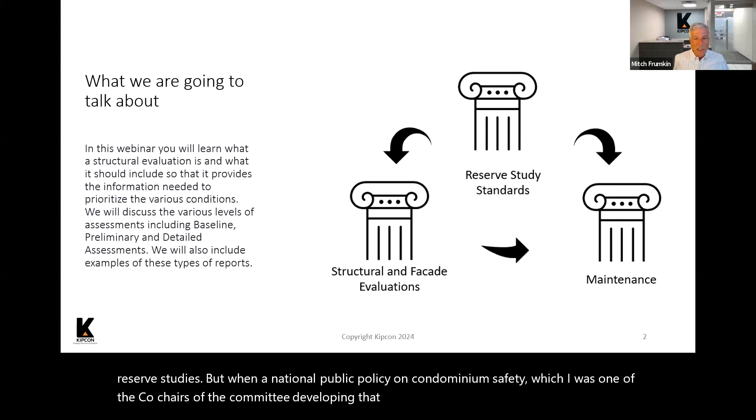One of the things that came into play very quickly is people were thinking the cause of the tragedy was due to the reserve studies. But when the National Public Policy on Condominium Safety - which I was one of the co-chairs developing - came together, we concluded pretty quickly it's not just reserve studies. It's connected to the structure and facade of the buildings, and maintenance, which is a big part. If you tie these three things together, this is what keeps our buildings safe.

So when I go through the presentation, I've pretty much broken it down into these three parts.

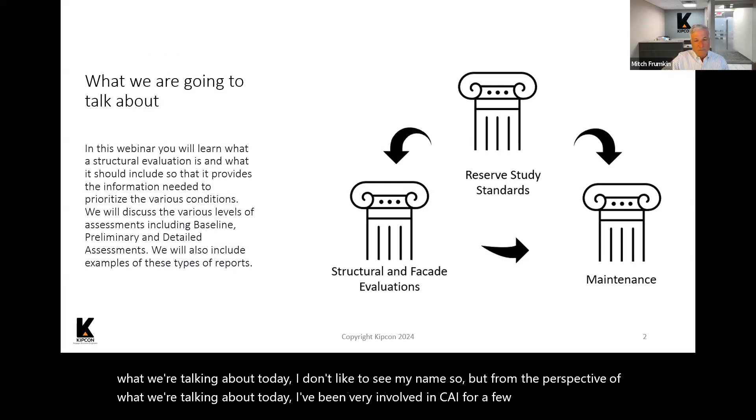Not that I want to bore you, but this is a little bit about me - I don't like to see my name up there, but from the perspective of what we're talking about today, I've been very involved in CAI for a few years. I was national president a number of years ago, but when Champlain Towers happened, CAI immediately put together a task force for the public policy on condominium safety. I was one of the co-chairs of the original version, and the only engineer involved in structural engineering on the task force.

We reached out to over 600 people across the country for input, and we came out with a public policy, which I'll show you a picture of in a couple of seconds. As this evolved, CAI then said we're going to update our reserve study standards to reflect preventive maintenance and structural integrity, and I was one of the co-chairs of that task force too.

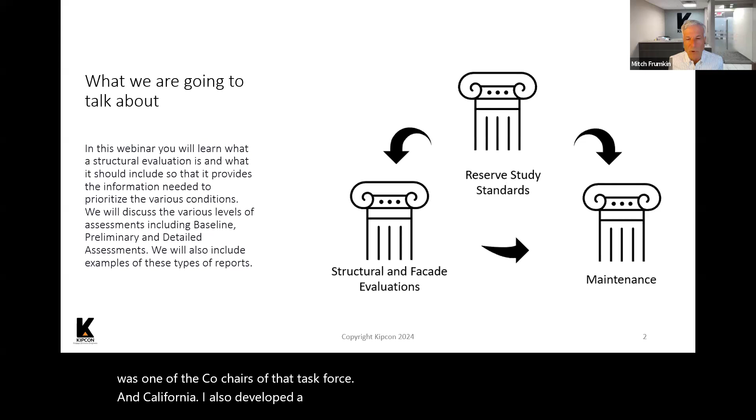CAI also developed a best practices report on maintenance, and I was one of the 3 or 4 people that worked on putting together that report. All these things are free - we can send you copies of the best practices report, the reserve study standards, all this stuff.

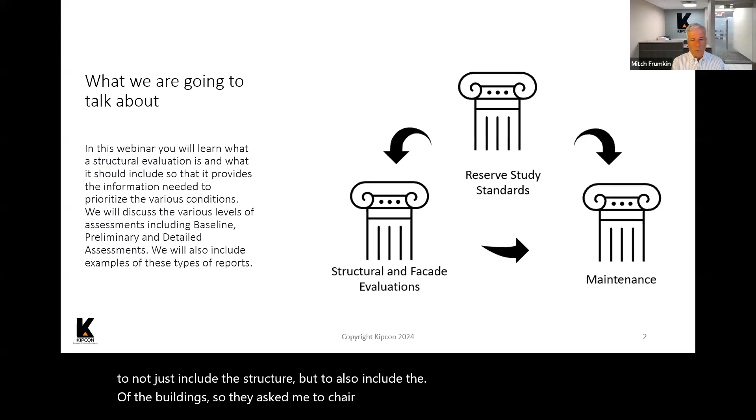Then CAI, about a year after this, decided based on feedback that we really needed to update the public policy on condominium safety to not just include the structure, but also the facades of the buildings. So they asked me to chair that task force, which I did, and the public policy on condominium safety was updated. One of the main changes is that it now includes facade evaluations, which I'll touch on as I'm going through.

So that's my involvement in this stuff. As a matter of fact, yesterday CAI New Jersey had a webinar on legislative initiatives, and I gave a presentation on what the structural integrity legislation and reserve study legislation in New Jersey is about.

So what we're talking about is to solve problems, not create more. For example, I'm going to touch on underfunded reserves, no maintenance makes the conditions worse, and no inspections let the buildings age without even knowing you have a problem.

Champlain Towers. Last summer in New Jersey, we had a balcony collapse on a condo which killed a worker. This impacted two things. In the state of New Jersey, we made sure, which I'll touch on in a second, that balconies are included as part of the structural evaluations.

And as well, the national public policy includes the facades, which include balconies. So this was due to things we learned as well as this collapse that took place in New Jersey.

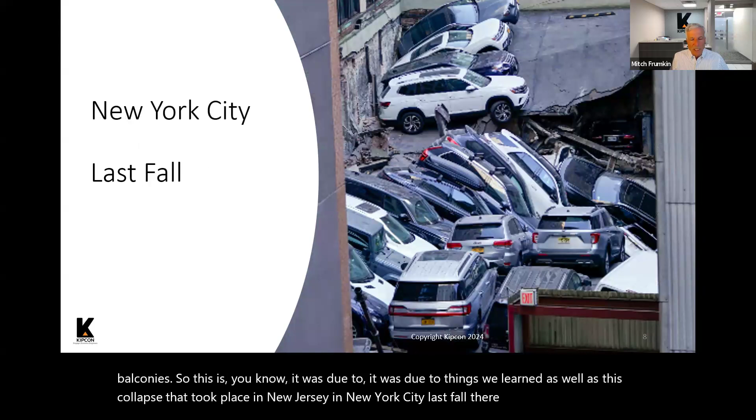In New York City last fall, there was a parking garage collapse due to lack of maintenance. And also there are a lot of things that happened in Florida based on new laws. I'm sure you read about it, whether you're from Florida or not, regarding the structural safety of a lot of communities in Florida - all kinds of things have been going on.

As a matter of fact, I was down in Florida on business about a month or so ago, and I was drawn to the site of Champlain Towers. So I went there and walked around, and there's a board there with the names of everybody that died in that tragedy. I was drawn to it because I've talked so much about it.

But in a lot of cases, it may say you have to do a reserve study or funding, but not both. And what good is doing a reserve study if you don't also fund it?

So, for example, the new laws in Florida require that you do reserve studies and fund them. In New Jersey, it's very specific that you do reserve studies and fund them, which I'll touch on, and maintenance and structural integrity. So this is how it's all tied together.

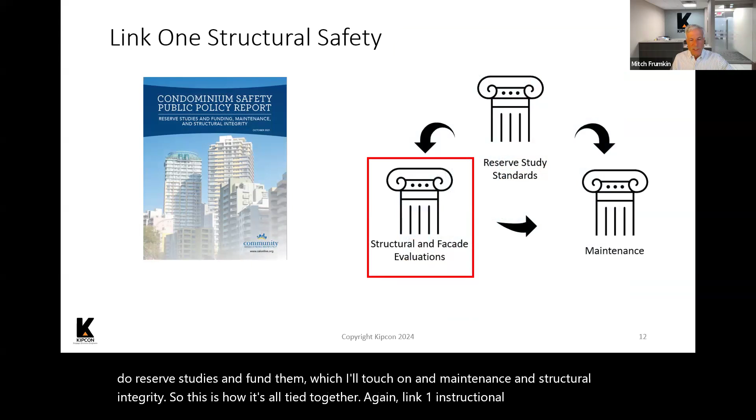So link one is structural safety. And let's talk about what is a building structure. Like I said, I'm going to go through this kind of quickly because I'm on slide 16 of 98 and I have 10 minutes left now.

That's why I'm looking over here, because you can see the arrow, right? I think you can see it.

It's made up of columns, which are the vertical things that hold up the floors, the roof, that type of thing. It's made up of this bracing. Let me go to the next slide because it's a little clearer.

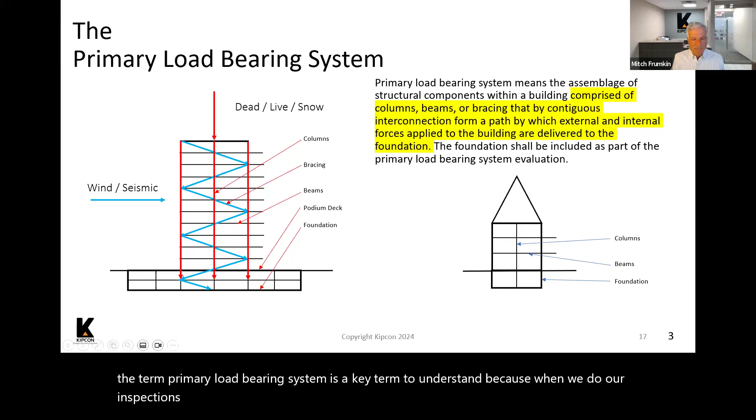And I'll show you why that's important. The term primary load-bearing system is a key term to understand, because when we do our inspections, it's based on inspecting this primary load-bearing system. I'll show you why in a second.

Here's an example of a primary load-bearing system. And you see, this is an actual building. Now you see it doesn't look just like this. You've got the beams, you've got the columns, and you have the bracing. This is a building that was under construction that I saw, and I took a picture of it.

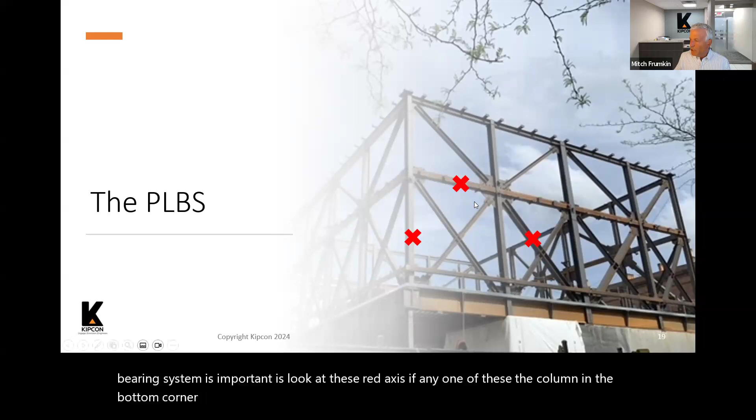So what this is showing is the purpose of the inspection and why the primary load-bearing system is important - look at these red X's. If any one of these, the column in the bottom corner here, or this beam, or this bracing, if any of them are not maintained for some reason and rust away, this happens to be a steel building, then there's a possibility that if this column is rusted away, there's nothing holding up this section of the building and it will collapse.

If this bracing disappears, rusts away, what's going to happen when the wind blows? The building can fall over. What happens if this beam rusts away? Then this floor can collapse.

So the thing to keep in mind from this is that the primary load-bearing system is based on a system where if any one part of it deteriorates and disappears, the building can partially or totally collapse.

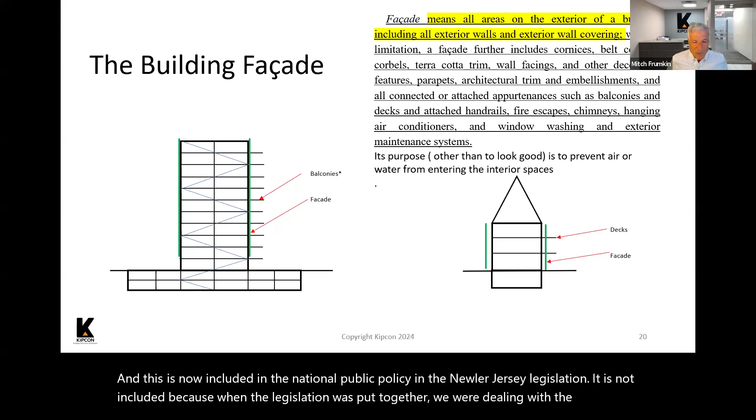That's the thing to keep in mind regarding the primary load-bearing system. The building facade is now included in the national public policy, but not in the New Jersey legislation, since that was dealing with the structure and it's hard to change legislation once it's in the system. The New Jersey legislation doesn't include the word facade, but it does include this balcony, which I've marked with an asterisk. Although the balcony is really part of the facade, we included it as part of the primary load-bearing system to make sure it gets inspected, without having to change the entire legislation.

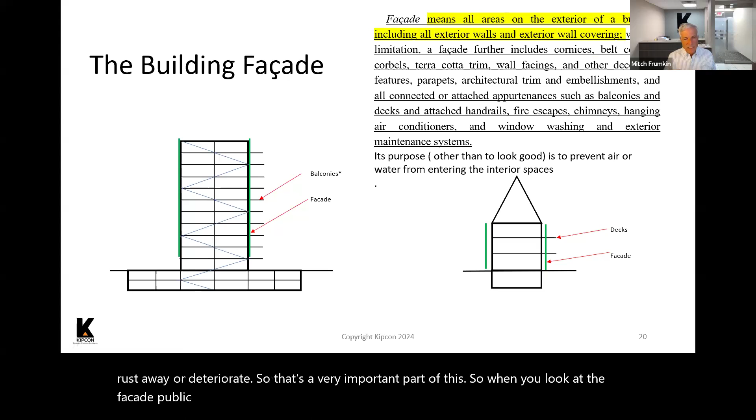The building facade protects the building from the elements like rain, and it makes the building look good. But probably the most important thing we don't pay enough attention to is that if water gets through the facade, it can reach the primary load-bearing system and cause it to rust away or deteriorate. So when you look at facade public policy or any facade legislation, it's not just about inspecting the structure of the facade and balconies, but also inspecting anywhere water can get through, like expansion joints, to make sure water can't penetrate the facade.

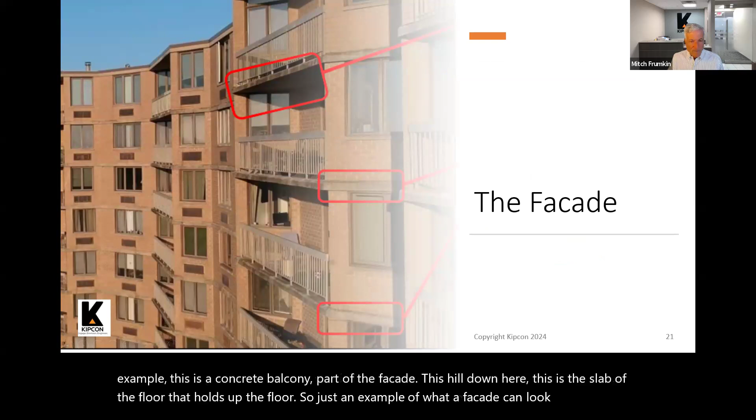I've gone through it pretty much in detail. There are some changes, but more in terms of simplifying the way it's written rather than adding new content, because it's already a pretty comprehensive manual.

We looked at what others do around the world. In Ontario, Canada, they have specific requirements for structural condition assessments of existing buildings. That came into place about 20 to 25 years ago after a parking garage collapse in a condominium. They require, I believe every 6 years, a structural review as part of a reserve study. Singapore has the most comprehensive structural integrity inspection requirements I've seen for residential buildings, called Safe Structures and Buildings, and it's quite detailed. We used these as references when putting together the CAI public policy.

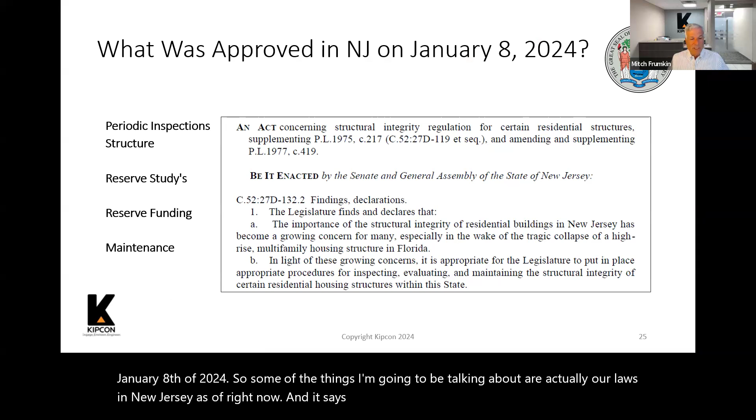At the beginning of the legislation, it says the importance of structural integrity of residential buildings in New Jersey has become a growing concern for many, especially in the wake of the tragic collapse of a high-rise multifamily housing structure in Florida, which was Champlain Towers.

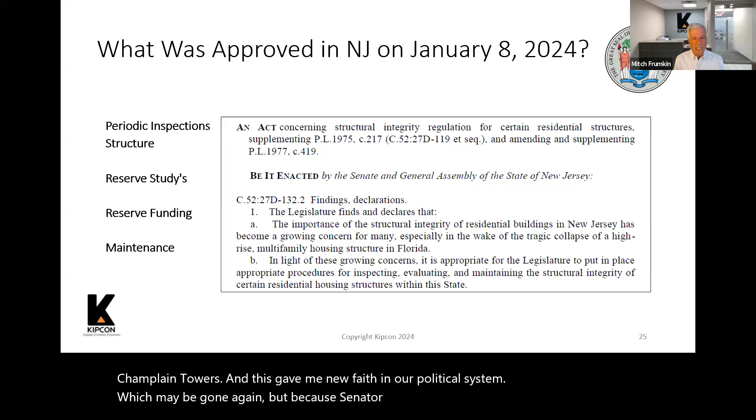This gave me new faith in our political system, because Senator Singleton in New Jersey reached out to us, CAI, to put together this law. So myself, Ed St. George, and Dave Ramsey in New Jersey worked with the senator to put together this legislation based on CAI National's public policy. I don't know what would have happened if CAI National hadn't done that public policy, because I don't know what people would be using to come up with their legislation.

I was also on a task force in Delaware. New Castle County, Delaware came up with a legislative initiative for periodic inspections, including the structure and facade, as well as requirements for maintenance. That's been law in New Castle County, Delaware since about May of 2023, so about a year now.

If you look at the CAI National website, under their governance section you'll see a listing of all the different states that have things in the works in terms of reserves or structural integrity legislation, what's in process, what's been approved, what's been denied. You can see a listing of what's going on.

Now, 'covered building' is a very important term to understand, because in the legislation and public policy, a covered building is a building that should be required to follow these requirements.

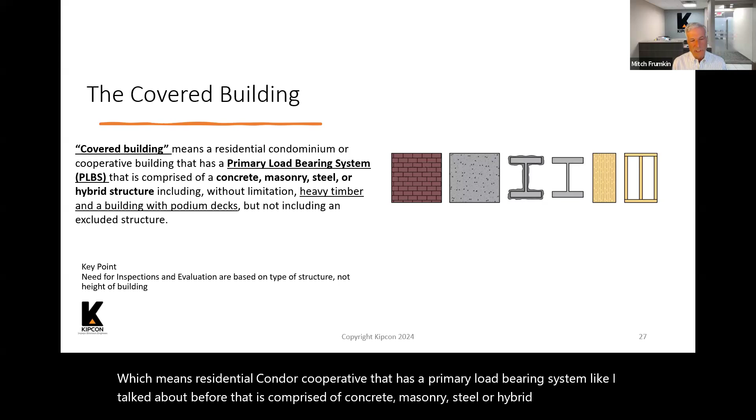So for example, in New Jersey, there's a definition that says these are the types of buildings that need to do these structural integrity inspections, called a covered building. It means a residential condo or cooperative that has a primary load-bearing system, like I talked about before, comprised of concrete, masonry, steel, or hybrid structure. Hybrid structure really means a combination of concrete and steel, for example, including without limitation heavy timber.

Now I'm going to talk about heavy timber for a second. In a few seconds I'll show you some pictures, because people say heavy timber could be just any type of building made out of wood. But keep in mind, this has to have a primary load-bearing system of heavy timber, meaning that if one piece of that wood rots away, a portion or total part of the building can collapse. Keep that in mind, I'll show you a picture in a second.

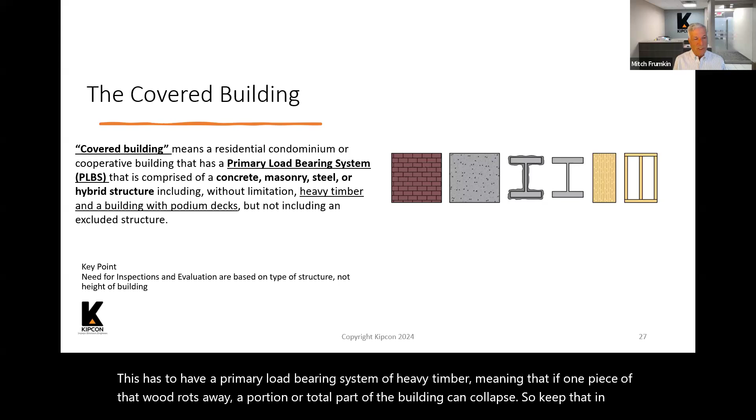And building with podium decks, but not including an excluded structure. I'll tell you what an excluded structure is in a second, because everybody's concerned about whether their building is included or not. Key point to remember is that structural integrity inspections are based on the material of construction. It is not based on the height of the building.

So it's not high-rise buildings. There are plenty of buildings much shorter than high-rises that have primary load-bearing systems made out of concrete, masonry, steel, or any of these things. The difference, which I don't think is on a slide, is that structural integrity inspection is based on the material.

When it's based on facade inspections, it is based on the height of the building. Most of the legislation you see says you need to inspect the facade if the building is more than 3 or 4 stories in height. In Delaware, because I was involved in it, it says 4 stories in height, but if it has balconies that are less than 4 stories, you still have to inspect the balconies, even though you don't have to look at the facade.

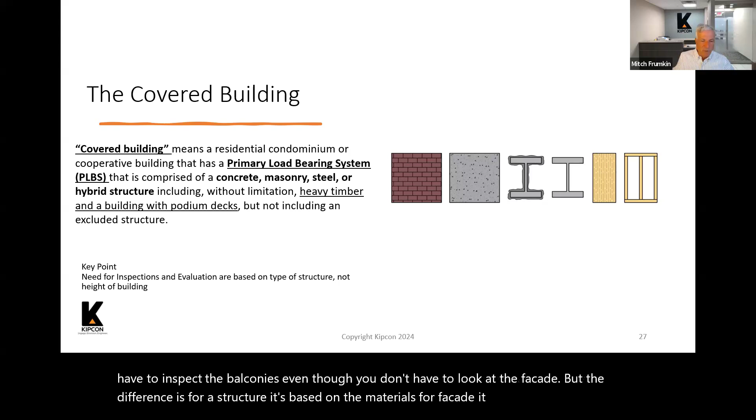The difference is, for a structure, it's based on the materials. For facade, it is based on the height of the building. So that's a covered building. Now, I added these slides this morning.

Let's talk about concrete. Concrete is comprised of two different materials: concrete and steel reinforcement in the concrete. Concrete is very, very good in compression when you push it together. It's not good in tension when you pull it apart. Steel is very strong in tension. So concrete is made up of...

...steel. The reason the steel is put there is because there are certain sections of a concrete beam or column where it may go into tension. I'm a structural engineer, so I'm not going to go into a lot of detail, but that's why reinforced concrete has steel in it. It's made up of two materials, reinforced concrete.

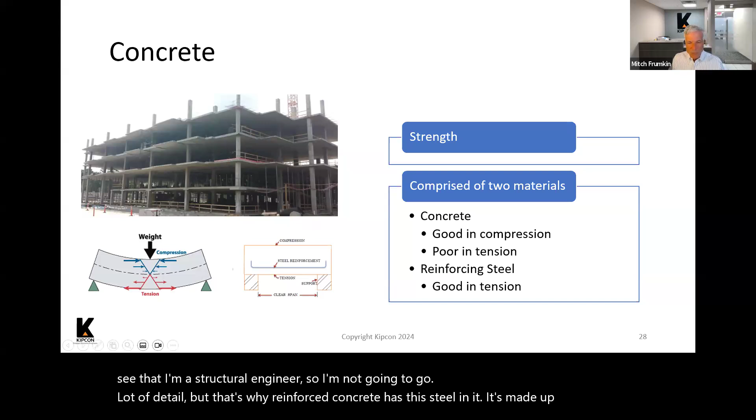As it gets bigger, it pushes out the concrete. Concrete is very bad in tension, like I said. So when you're pushing out the concrete, it gets in tension, and sections of it fall out. So a very, very common cause of deterioration is structural. In reinforced concrete, the steel on the inside rusts because water gets through the concrete.

I could go into detail about how to prevent that and different things I can do, but it's very common. Water gets into the concrete, rusts the reinforcing steel, and then pops out the concrete, which exposes the steel even more. It rusts more and more, and the conditions get worse and worse.

It doesn't take an engineer to tell you that you have problems with a reinforced concrete column or beam, because you can see the rust on the surface, you can see the conditions. You need an engineer to tell you how to fix it, but you can tell when these problems are occurring, which I'll show you some pictures of.

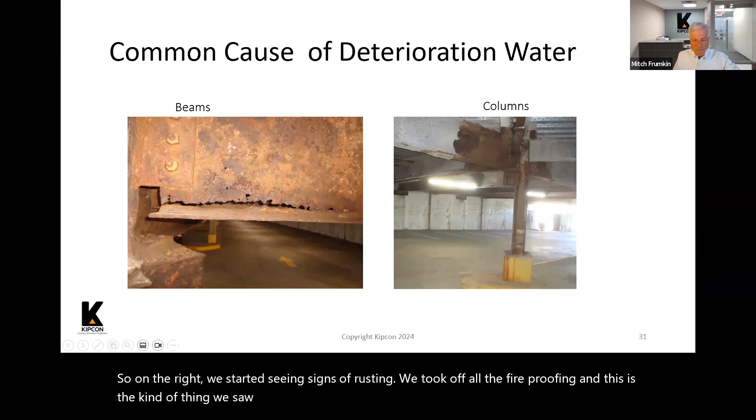The thing that makes it even harder to see is that in a lot of parking garages and below podium decks, the steel is covered with this fireproofing material, this white stuff. So you can't see the steel, but you can see signs of rusting if it starts turning brown. On the right, we started seeing signs of rusting. We took off all the fireproofing, and this is the kind of thing we saw underneath. So steel rusts and loses its strength - that's a problem with steel.

Wood is a very interesting material. I'll show you where I really like wood, because wood has so many different things going on. Its strength varies - if you're going parallel to the grain, it has one strength; perpendicular to grain, it has another strength. If it gets wet, you lose a lot of strength, and if the temperature goes up, you lose a lot of strength. So it's a very interesting material to work with. But wood - if you can see it, you know if it's rotting and you're losing strength.

Look at this bottom. This is a beam that was holding up a deck at a building we're working on. And from below, you can see it. Then you pull off the decking, and this thing is totally losing its strength.

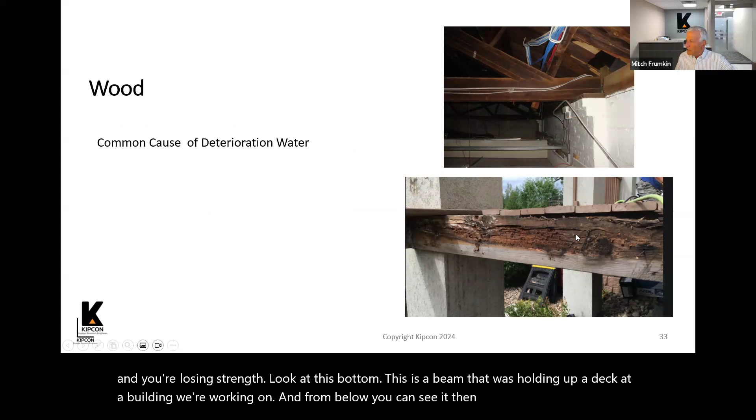This is a common cause of deterioration in all these things: water. As buildings get older, just from age, they will lose strength just from aging, but as soon as you put water on them, it gets worse and worse.

Interesting thing is, for people close to the ocean - and there's somebody here from Florida, well there's oceans everywhere - if you have salt in the water, it can cause this deterioration of steel to occur faster. In Florida originally, and I'm pretty sure it's been changed, it said the frequency of inspections for buildings within 3 miles of the ocean was more frequent than buildings further away. I think it's been changed because it happens a little faster, but I think now it's all the same.

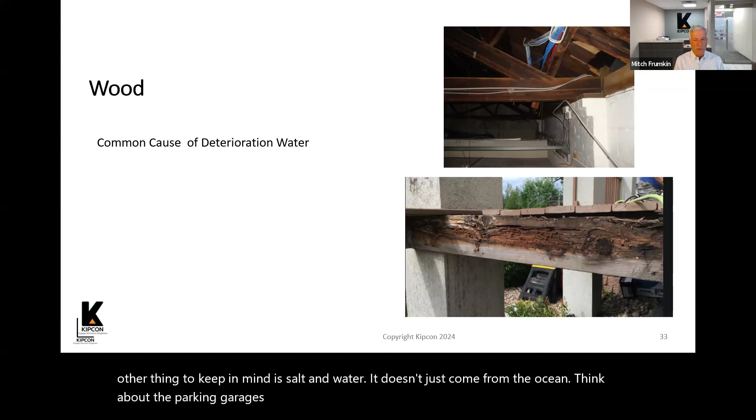The other thing to keep in mind is salt in water doesn't just come from the ocean. Think about parking garages in the north - the cars are driving in, they're carrying the road salts. The road salts come in and go onto the structure and can cause it to deteriorate faster. So salt in water doesn't only come from the ocean.

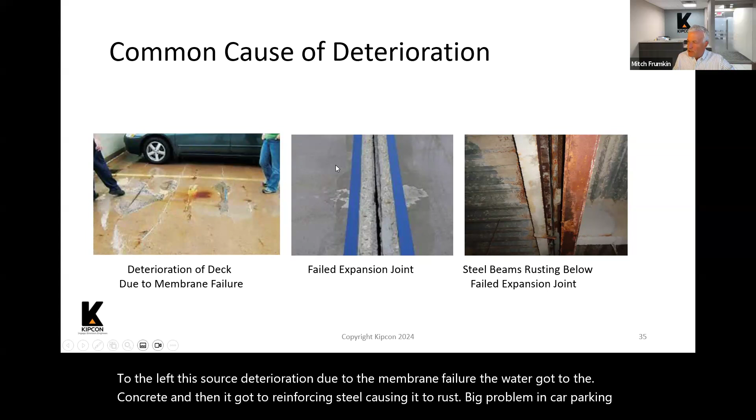Big problem with car parking decks is this - an expansion joint in the middle. An expansion joint allows the parking garage to expand and contract when temperatures change. They put joints in so it allows it to move back and forth. These joints generally have a plastic type of cover on them to keep water from getting through. It really doesn't make any difference in terms of the ability to expand and contract, but it keeps the water from getting through.

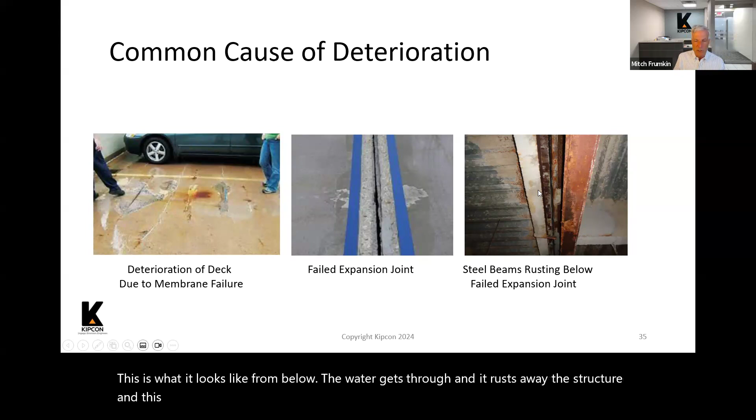If that plastic cover disappears and allows water to get through, generally underneath there's a beam on each side of that expansion joint holding up the podium deck. This is what it looks like from below. The water gets through and rusts away the structure. This is very hard to fix because they're right next to each other. It's a tough fix, but we've been involved in a number of them to fix these things.

Keep in mind, if you see anything where water's getting through or an expansion joint that's not working right, you've got to replace it because it'll probably cost you a few thousand dollars to replace. But a repair like this, if you don't replace it, can cost you $1 million. So that's a common cause of deterioration.

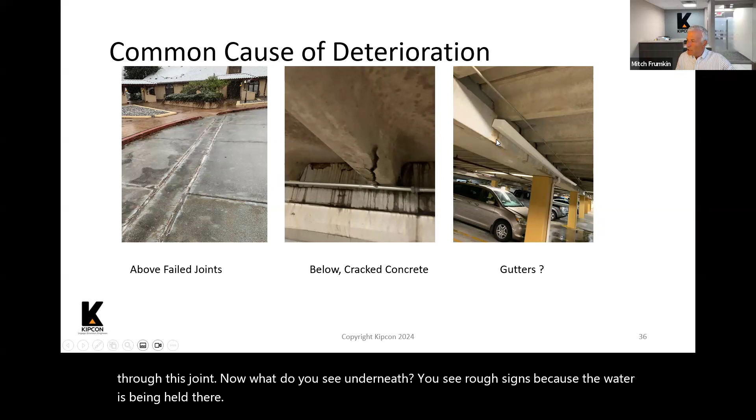Now what do you see underneath? You see rust signs because the water is being held there and you're not seeing what's going on to the structure of this beam because the water is sitting there. A lot of people try to save a few dollars and do things not realizing what's happening underneath.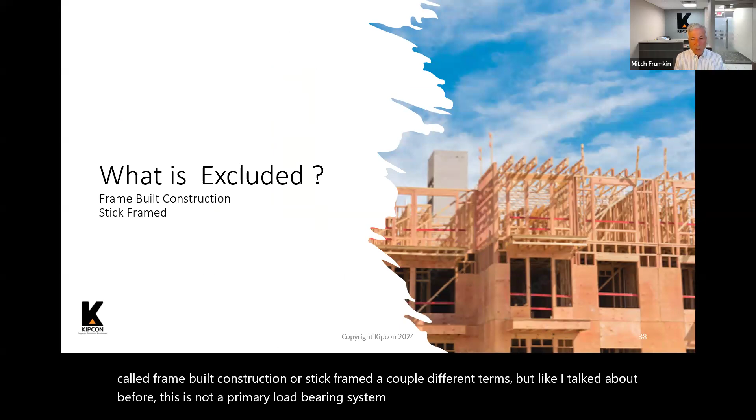What's excluded? I'm just going to show you pictures rather than reading the words. Here you have what's called frame-built construction, or stick-framed. This is not a primary load-bearing system made out of wood, because if any one of these 2x6s that are vertical and hold up the walls or the floor rots away, a section of the building will not collapse. So this type of construction is excluded because it's not a primary load-bearing system the way I defined it.

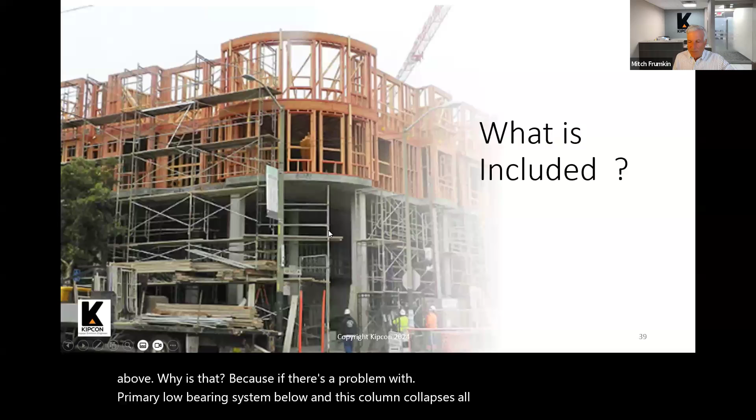Here's a good one, because this is a combination. Above it has stick frame, which is excluded, but below you have a podium deck and a primary load-bearing system made out of reinforced concrete. So in a building like this, you do have to inspect the primary load-bearing system underneath, but you don't need to inspect this type of structure above. Why? Because if there's a problem with this primary load-bearing system below and this column collapses, all these residential units are coming down with it. So that's a combination of primary load-bearing system and stick frame.

What also is not covered: single-family homes are not covered, and the clubhouse is not covered. So even if this clubhouse has the primary load-bearing system I was talking about, it's not covered and does not require an inspection because nobody lives in it. I'm not saying you shouldn't inspect it if you see a problem, but as far as legislation and public policy, these things are not included. It's based on residential housing that somebody lives in.

So the planning for safety starts when the building's being built. People look at it and say, well, we don't have to worry about this until the building's 10, 15, 20 years old. But keep in mind that when a building is being built, if it's not built in conformance with the design drawings for the structure, it can create a structural problem.

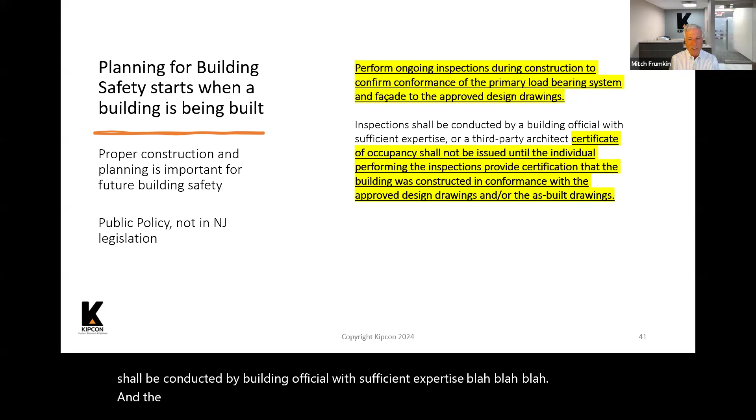So in the public policy, it says inspections shall be conducted by a building official with sufficient expertise, and the certificate of occupancy shall not be issued until the individual performing the inspections provides certification that the building was constructed in conformance with the approved design plans. And if it hasn't been, there needs to be certification saying it's equivalent to the design plans, because if it's not built that way, you're going to have structural problems later on.

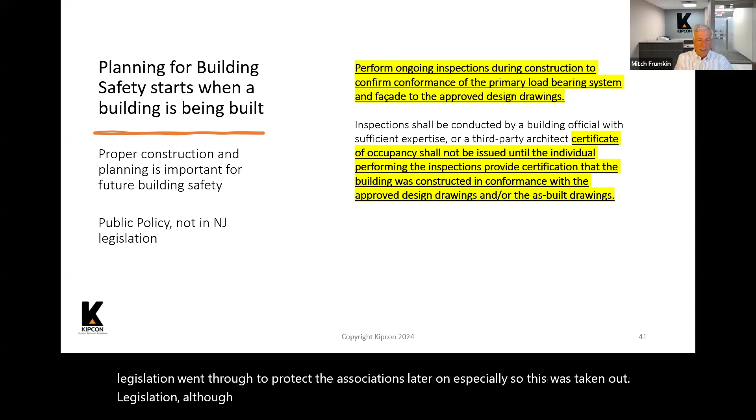I will tell you that in the state of New Jersey, although the public policy says this should be included, it's not in the legislation because we got huge pushback from the builders and their lobbyists. They said, why do we need to do this if the municipal inspectors come out to inspect during construction? Most people felt it should be included, but the builders gave big pushback. We wanted to make sure the legislation went through to protect the associations later on, so this was taken out of the New Jersey legislation, although it's still in the public policy - public policy, but not New Jersey legislation.

Here it goes on to say that in addition to structural integrity - I'm jumping to reserves and budgeting for a second - the public policy connects structural integrity to maintenance and reserves. It says the governing documents should include a maintenance plan for the association: what should be done to maintain the buildings, how often, and the cost to do it.

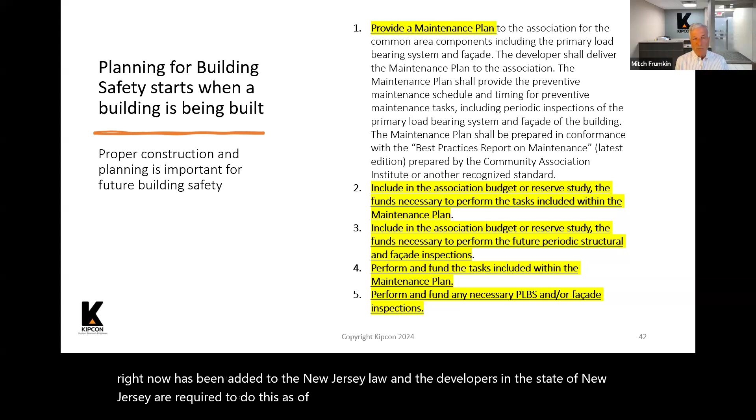And I will tell you, what I'm talking about right now has been added to the New Jersey law, and developers in the state of New Jersey are required to do this as of January 8th. They didn't really have a lot of pushback on this, because it's like buying a car that has an operating manual in the glove compartment, and you move into a community worth millions of dollars and it doesn't tell you how to maintain it.

It says provide a maintenance plan. Include in the association budget or reserve study the cost to perform the tasks in the maintenance plan, and the funds necessary to update the reserve study. It says perform and fund the tasks included with the maintenance plan - that's duplicative. And if it's a building with a primary load-bearing system requiring ongoing structural integrity inspections, the cost of those inspections and the timing should be included in the reserve study.

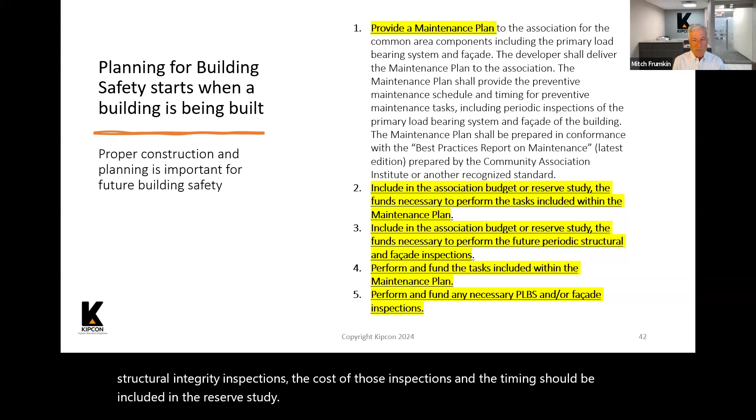This is in the public policy, and this pretty much word for word is included in the legislation, the law in New Jersey, that developers are now required to do this.

The first inspection. For a building that has a certificate, when the law or public policy went into place, there's what I call the 15-year rule. I'll tell you that in the public policy nationally, it's a 10-year rule, not 15. But we got a lot of pushback in New Jersey that it was too quick, and we gave in and said okay, we're going to use 15 years. But nationally, the public policy says 10 years.

For covered buildings that have a certificate of occupancy issued more than 15 years ago - and I'll tell you, throughout the country, and in New Jersey, it's really prevalent that buildings are older than 15 years old with this primary load-bearing system - if it's more than 15 years old, you must have a structural inspection within 2 years. In New Jersey, that 2 years started as of January 8th.

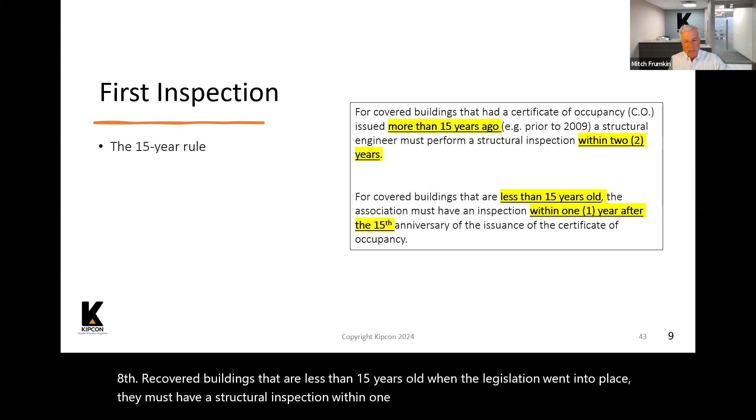For covered buildings that are less than 15 years old when the legislation went into place, they must have a structural inspection within 1 year after the 15th anniversary. So that's the 15-year rule for the first inspection.

The first report, it says in the legislation as well as in public policy, should be prepared in accordance with the American Society of Civil Engineers - I went over it before - and provide any information or guidance necessary to maintain the structural integrity of a covered building. So I touched on this before.

Subsequent inspections, this is the 5-year rule. In the national public policy, it says the first inspection should be in 10 years. Up until the building is 20 years old, inspections can be every 10 years. After 20 years old, there should be an inspection every 5 years - that's because as buildings age, they deteriorate faster. So the public policy says 10 years, 10 years, and then every 5 years.

Keep in mind, it's a maximum of 10 years, maximum of 5 years, because if an engineering report says it should be in 3 years instead of 5, you have to match what the engineering report says. In New Jersey, the 5-year rule is there, but the first inspection is after 15 years, and then every 5 years after, you have to have it updated. So that's what it is in New Jersey, but nationally it's slightly different.

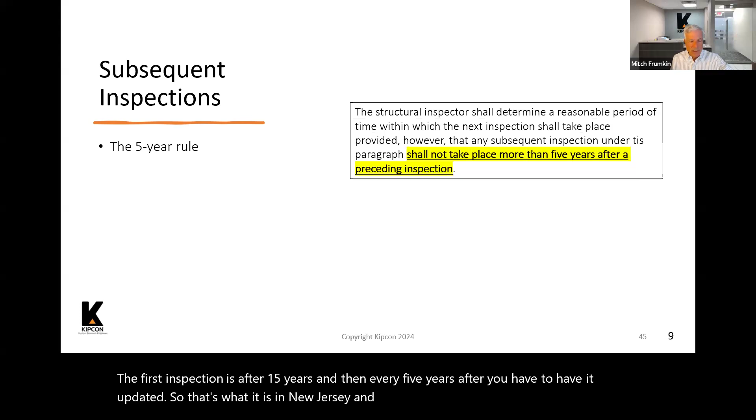All right, so subsequent reports. When you do a subsequent report every 5 years or whatever the period is, you use the original report that was done as what's called a baseline report. That baseline report establishes the condition of the buildings, and the subsequent reports use the prior report to note any new or progressive deterioration.

So if you do your first inspection report after 15 years, the next report 5 years later would use the original report at 15 years to note any new or progressive deterioration. But after the 20-year report is done, that then becomes the baseline report, because your next report 5 years later is measured against the prior report to note any new or progressive deterioration, and to set forth the corrective maintenance required to address it.

It also says, in the New Jersey legislation as well as the public policy, it has to be provided to the covered building owner, who shall undertake measures necessary to effectuate the corrective maintenance. So you've got to give it to the owner to fix these things. New Jersey legislation and public policy also requires the engineer who does these inspection reports to also give a copy of it to the municipal authorities.

So when we finish our structural integrity reports, we are required to give a copy of that to the municipal authorities so they can look at it and see if there's anything that we say is in bad condition that needs to be fixed right away. They get involved in the process because they are given copies of the report.

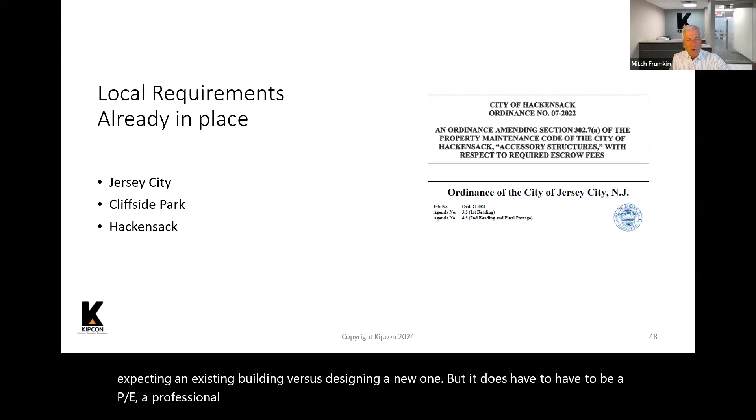In New Jersey, there are also a number of local requirements that were in place even before this law came into effect. For example, Jersey City, Cliffside Park, and Hackensack have ordinances. Keep in mind that if there's a local ordinance that requires something and then a state law comes out, generally you have to do whatever is more critical, not the one that's less critical.

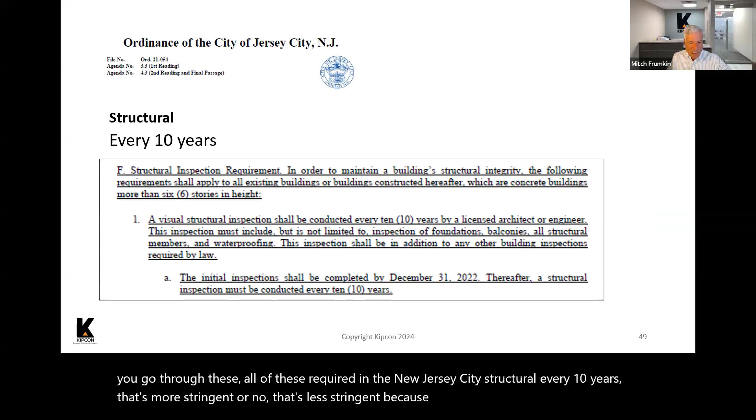So for example, Jersey City requires structural inspection every 10 years. That's less stringent, because the state law says 5 years. But they require structural inspection every 10 years, and they define what it is. It doesn't exactly match the law, I'll tell you that, but whichever one is more stringent applies. They have a list that you follow in Jersey City.

In Jersey City, they also require that the facade be inspected every 5 years. Keep in mind that the state law does not require facade inspections, but locally they do, so you do have to do them. There are requirements for the facade inspection, and again there are reports you have to fill out, all kinds of things.

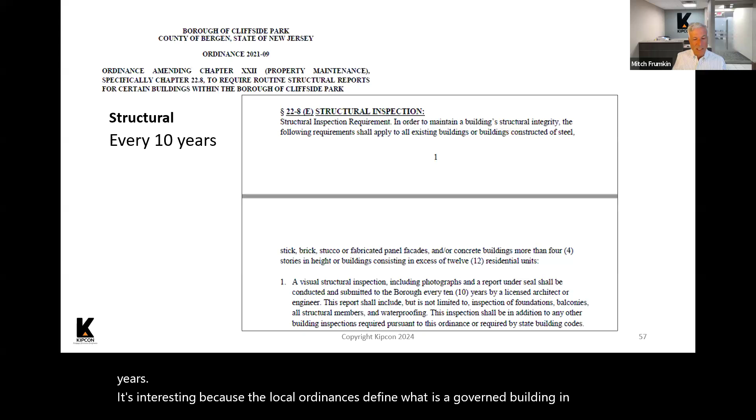Now we go to Cliffside Park, structural inspection every 10 years. It's interesting because the local ordinances define what is a covered building in different ways. I'm not going to get into that, but they do define it differently. They all say it has to be done by a licensed professional, and facade inspection every 5 years. In Hackensack, they had a parking garage collapse a number of years ago, so they require all parking garages to be inspected every 5 years. That's a local ordinance.

Now, what does it look like? Let's see, how much am I doing? I got 16 minutes to do the next 38 slides. We'll get there.

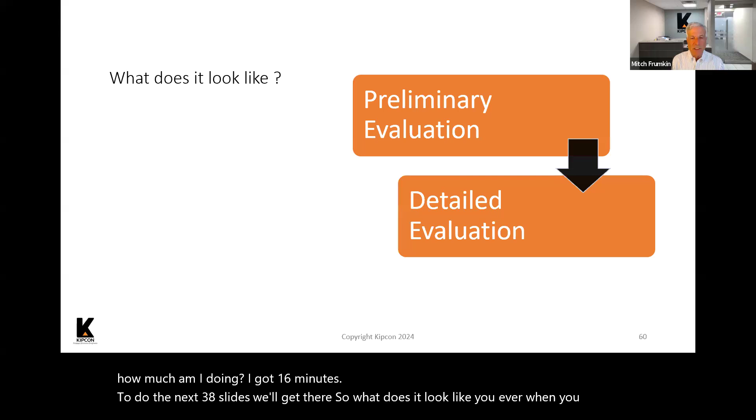So what does it look like? When you do these studies, they're broken into two types: a preliminary evaluation and a detailed evaluation. Preliminary evaluation means you look at the entire building. If you see any signs of deterioration, say rust on a ceiling, or rust on the beams under the podium deck that you can see on the fireproofing but you can't see the beam itself, then you have to put in your report that the next step is a detailed evaluation, which may involve taking off the fireproofing to look underneath at the structural steel, like in that picture I showed you. The legislation requires that you first do a preliminary evaluation, and then if you see problems, you have to do a detailed evaluation.

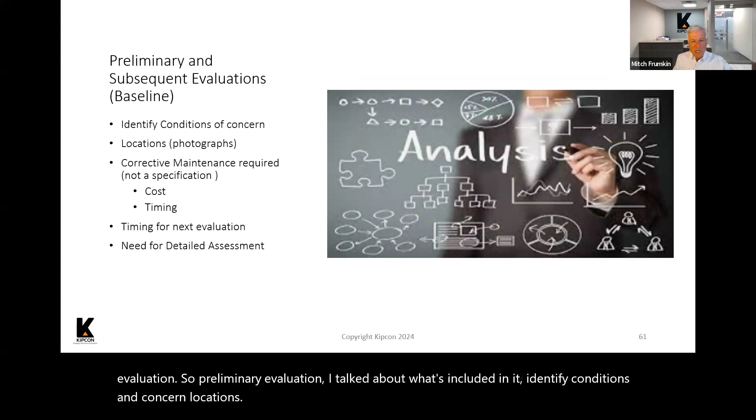So for the preliminary evaluation, I talked about what's included: identifying conditions of concern, their locations, corrective maintenance needs. Corrective maintenance means if you see something that needs to be fixed, you have to correct it and list what it is, the timing for the next evaluation, and the need for a detailed assessment, which I touched on.

What does it look like? It has a table of contents and attachments, then a description of the structure. For example, in this case, it states this is a reinforced concrete building, and the primary load-bearing system is made out of reinforced concrete. Now, this is what reinforced concrete looks like.

You have the steel inside the concrete, and this is what it looks like and where the steel is inside the concrete. So there's a description of the structure, continuing with these concrete beams and concrete columns.

Up above in this report, we actually had the original design drawings, showing that we know what's inside of those beams, where the reinforcing is, and how it's built. That's a description of the structure, or a description of the facade, similar thing if it requires looking at the facade.

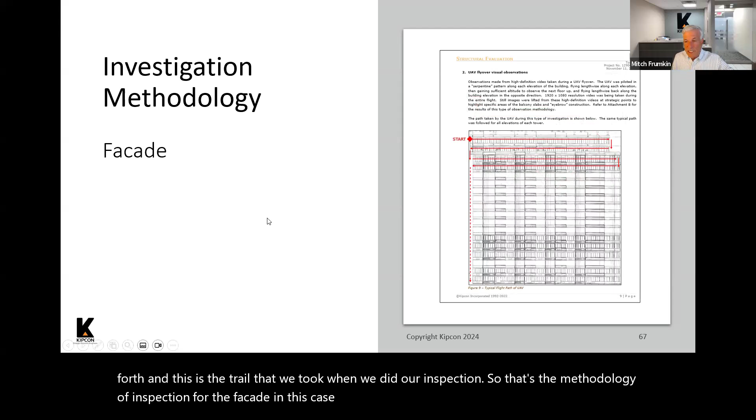For the facade, in this case they had us do a facade inspection, even though it's not a requirement in New Jersey, but this is a New Jersey building. So we used a drone, starting at the top, going back and forth and taking pictures. This is the methodology.

Then what are the findings? We found in the parking garage cracking and a number of different things. Let's see how it's doing - I'll go into more detail in a second, but we found cracking. This is what the cracking looks like.

We took the plan on the left and identified which column we looked at. It said the observed deficiencies: none, none, none, none. But even with no deficiencies in this original baseline, we still took pictures, because when you go back for the next inspection, you'll look at these to see if deficiencies developed. Here's a picture of all four sides of that column.

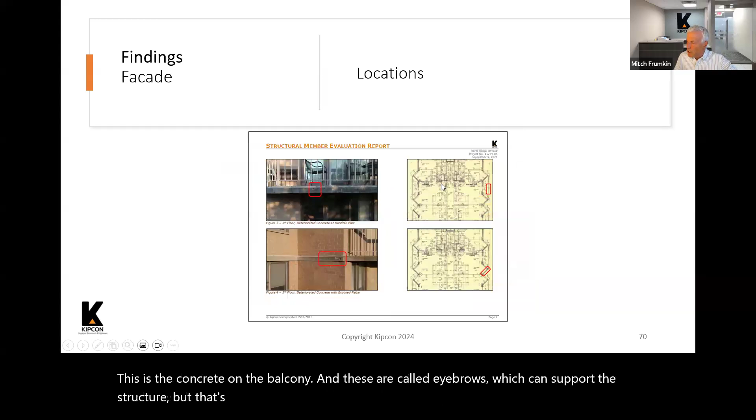Same thing here - this is the concrete on the balcony, and these are called eyebrows, which can support the structure, but that's just a term used. On the right, the red boxes show exactly where the pictures were taken, by drones.

Same thing here - this is another facade where we're looking at it, showing exactly where the picture was taken, and this is what the picture looks like of the condition.

Here's a very important part of any study - when you have anybody do a study, you have to make sure they include condition descriptions in the report, so you can tell what the condition is at different locations and how important it is. For example, the findings and their severity are either severe, moderate, or minor - these are just descriptions we used. It would have a description like 'deterioration is visually observable,' and then the recommendation.

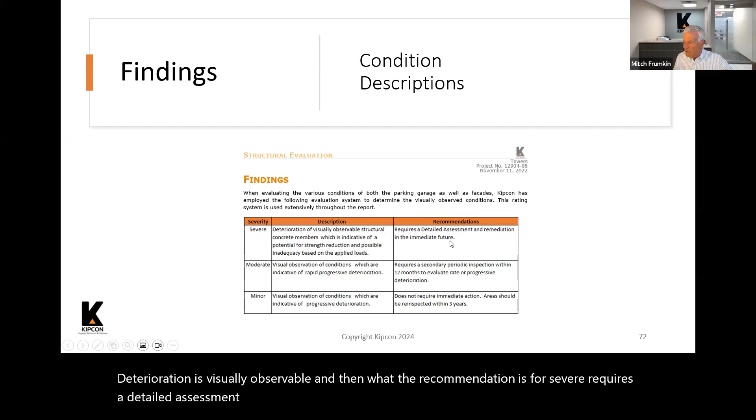For severe, it requires a detailed assessment and remediation in the immediate future. Moderate requires a secondary periodic inspection within 12 months - remember, the statutory requirement in public policy says next inspection in 5 years maximum, but in this case we say you have to go back in 12 months. Minor does not require immediate action; areas should be inspected in 3 years.

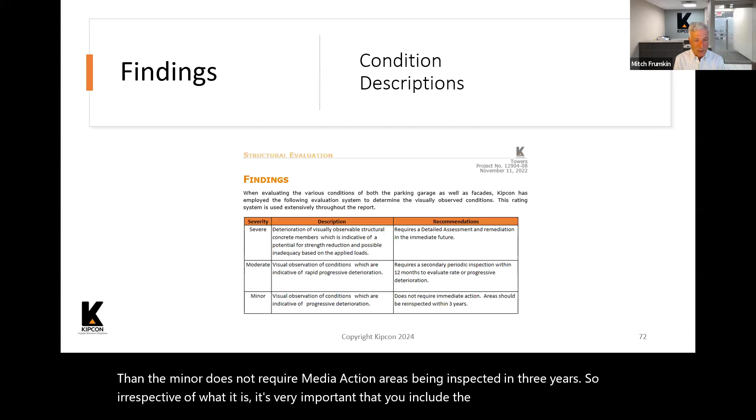So irrespective of what it is, it's very important that the report include condition descriptions. I know in the city of Philadelphia, they provide condition descriptions that you have to use. It's very important in the report so I can identify things as you go through.

Location, and what it is. Now let's get into severe.

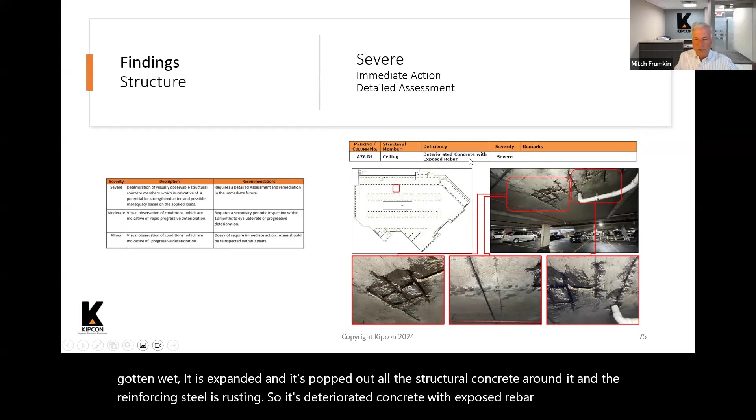Here you've got severe locations where the reinforcing has gotten wet, it has expanded, and it's popped out all the structural concrete around it, and the reinforcing steel is rusting. So it's deteriorated concrete with exposed rebar. Rebar is another term for reinforcing steel. Severity is severe, so that means you have to do something to fix it.

Here's another one, severe. This, believe it or not, is looking up from the bottom of a parking garage. What you see here looks like a beam. It's a combination of a beam and a trench drain at the bottom of a ramp. So picture this: there's a ramp that comes down, follow my arrow. The water flows down that ramp. On the bottom of that ramp, there's a trench drain to get the water to drain away.

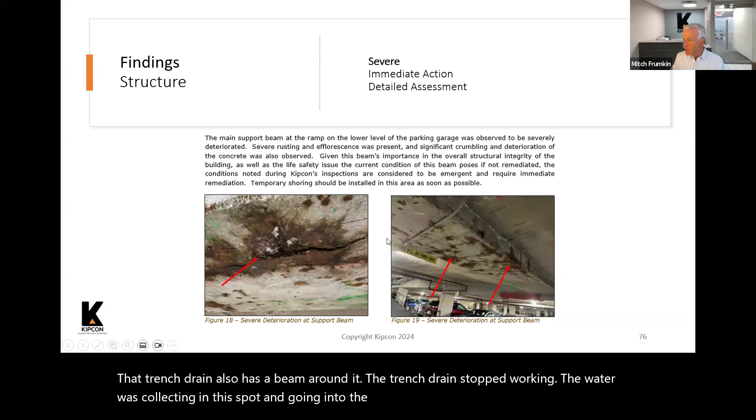That trench drain also has a beam around it. The trench drain stopped working. The water was collecting in this spot and going into the concrete, and look what it did to the concrete. It totally rusted away, and we were afraid this was going to collapse. Within a day after we did this inspection, there was temporary shoring put in to support this area before it was fixed. This was a pretty decent sized parking garage, and not to criticize anybody, but don't you think that a homeowner or a board member or a manager or whoever who's walking by can see what's going on? So there was temporary shoring put in because it was a severe condition.

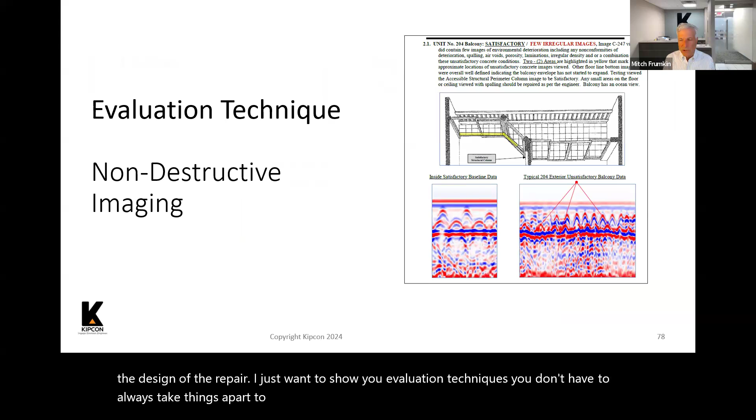And then you get into the detailed inspection, which includes invasive testing, material testing, for the design of the repair. I just want to show you evaluation techniques. You don't have to always take things apart to see what's going on underneath them. This is just one example: non-destructive imaging, where you can actually take an X-ray of the concrete to see if things are rusting underneath, and the condition and location of the reinforcing steel and things like that.

So keep in mind, the question comes up a lot: if things are covered and you can't see it, like in reinforced concrete, how can you tell without taking it apart? There are ways to do it. Non-destructive imaging is just one example.

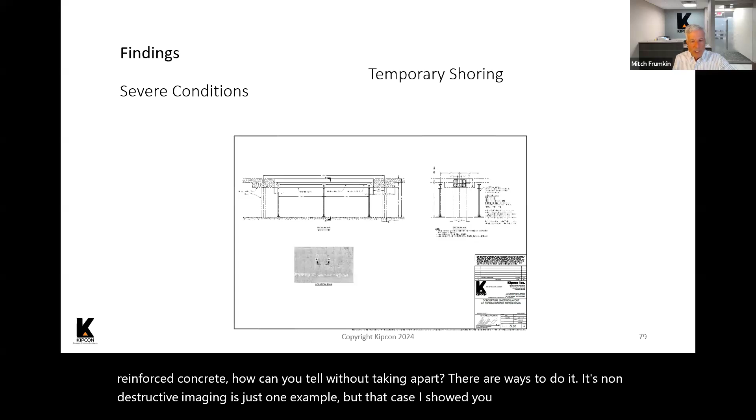But that case I showed you before, within a day we had temporary shoring installed. We designed it, and then this is the design of how it was fixed. Believe it or not, it took 6 months to get this fixed by the time they got a contractor. But here, if you look at the beam, you see this is a beam at the bottom of a ramp. Here's the trench drain; on both sides of it are reinforced concrete beams.

And imagine what happens if this trench drain fails. It just collects water and goes into the concrete. That's what happened here. All right, so now, I don't know if there's any questions about the structural part.

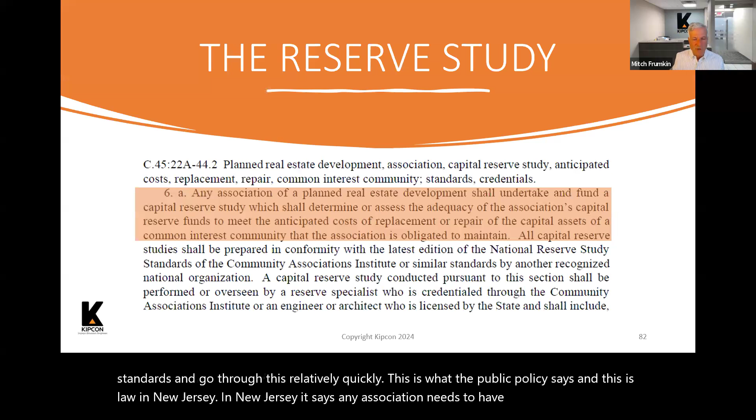Well, we'll hold them, because I'm jumping into the reserve study. Updated reserve study standards. I'm going to go through this relatively quickly. This is what the public policy says, and this is law in New Jersey. In New Jersey, it says any association needs to have a reserve study done and fund it based on adequate funding. That's what it says.

It says that if they don't have a reserve study, or if they have a reserve study that is less than 5 years old, it has to be updated within 5 years when the legislation comes into place, and then it needs to be updated every 5 years after that.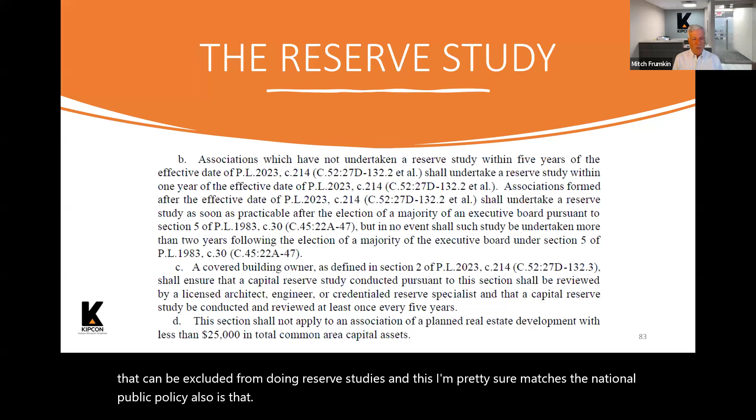It also says, as far as an exclusion—we talked about excluding buildings from structural integrity—but buildings that can be excluded from doing reserve studies, and this I'm pretty sure matches the national public policy also, is that if you have less than $25,000 in common area capital assets, then you aren't required to do a reserve study the way the legislation says.

The reserve studies need to include, and this is a significant difference in New Jersey from the national standard: it says that the reserve study has to include the anticipated costs associated with building maintenance. What the National Reserve Study standards say is that when you're doing a reserve study, you have to disclose whether or not the community is doing preventive maintenance. If they're not doing preventive maintenance, then you need to reduce the useful lives as necessary based on the fact they're not doing preventive maintenance.

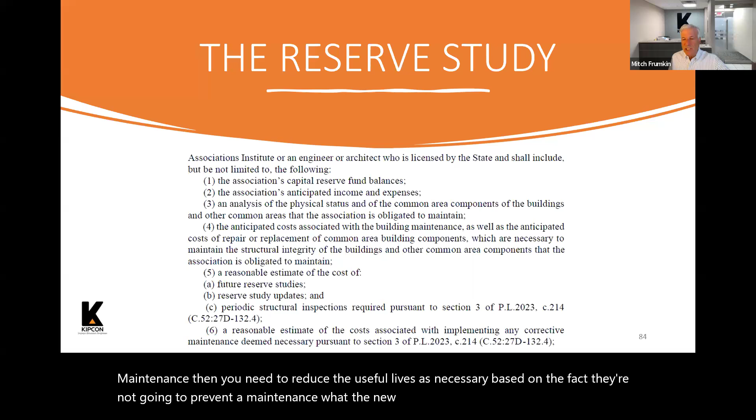What the New Jersey law says is that you have to include the cost of maintenance. So big difference. The association has to have a 30-year funding plan. So the question always comes up: what does adequacy mean? Because it always refers to having adequate reserve funds available to repair or replace the capital assets of the association without a need for a special assessment or loan.

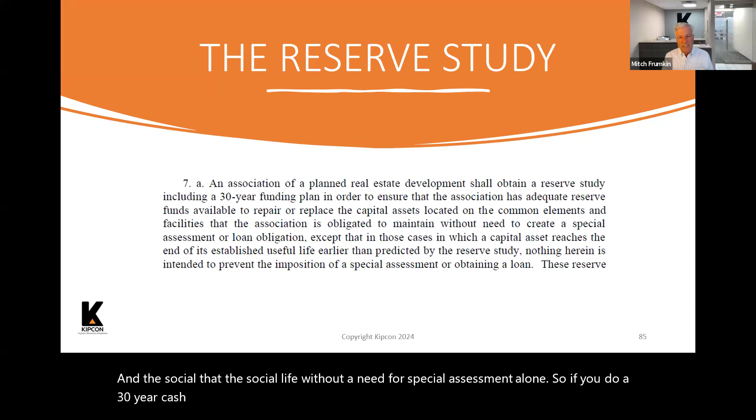So if you do a 30-year cash flow projection and it does not drop below zero, that's considered to be adequate based on the New Jersey legislation. If you look at the National Reserve Study standards, this is what's known as baseline funding, but it's also the most risky, and it's generally not recommended to do baseline funding or go down to zero unless it's a very special situation where you need to catch up in your funding. But when we put together legislation, everybody wanted it to be very simple.

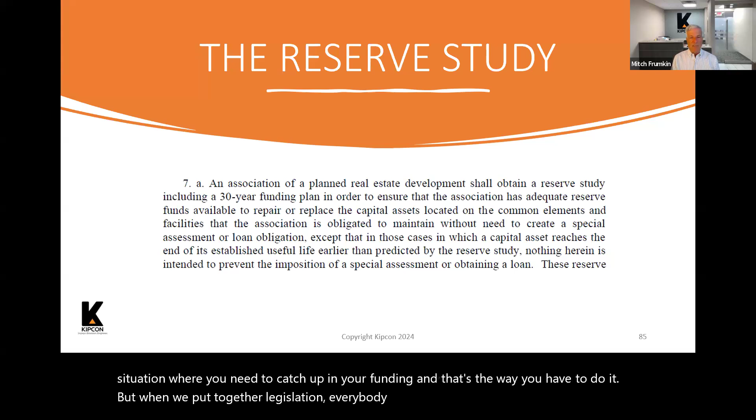So what does adequate mean? Adequate means you have enough money. Now, keep in mind, even if you go down to zero and you update it every 5 years, hopefully you'll never run into a deficit because you're required to update it. But most communities are not going down to zero. They're doing some kind of threshold funding, which is a whole other webinar I can give. But this is what the legislation says is the definition of adequate funding.

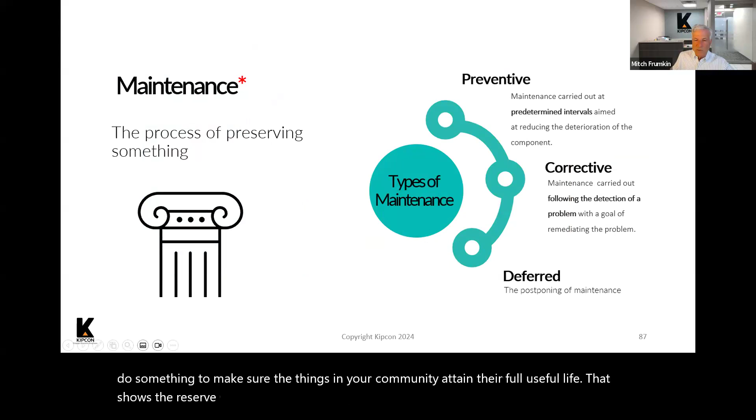Now let's jump into maintenance. There are 3 different types: deferred maintenance, when you don't do anything; preventive maintenance, when you proactively do something to make sure the things in your community attain their full useful life that shows in the reserve study; and corrective maintenance, which is when you go out and look at something and it needs to be fixed. I give you these definitions because the public policy, as well as the New Jersey legislation, and I'm pretty sure the Florida legislation, uses the terminology preventive maintenance and corrective maintenance. So you need to understand what the differences are.

What's the connection? I'm just about done. I'm going to finish on time. All right, so what's the connection between the 3?

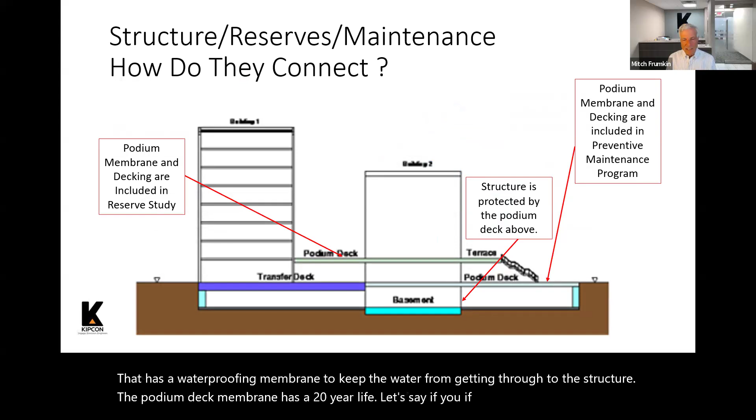Here's a podium deck as an example that has a waterproofing membrane to keep the water from getting through to the structure. The podium deck membrane has a 20-year life, let's say. If you don't maintain it and it doesn't get to its 20-year life, what's going to happen? The water's going to get through and it's going to get to the structure underneath. So then what's going to happen to the structure? I showed you pictures. It's going to rust away if you don't replace that expansion joint moisture thing that keeps the water from getting through.

So here's the connection: if you don't fund for reserves and you don't maintain, you can have significant damage that's going to cost you millions and millions of dollars more than what it would have cost if you would have just done this. This is a slide I use a lot: if you take the cost of preventive maintenance, it's generally a range of 4 to 5% of your replacement cost. But if you don't spend that 4 to 5% to do preventive maintenance, you're going to have to do corrective maintenance to fix something that generally costs at least 30, 40, 50 times the total cost of preventive maintenance you could have been doing over the years. From a life cycle cost perspective, every association should be doing some type of preventive maintenance.

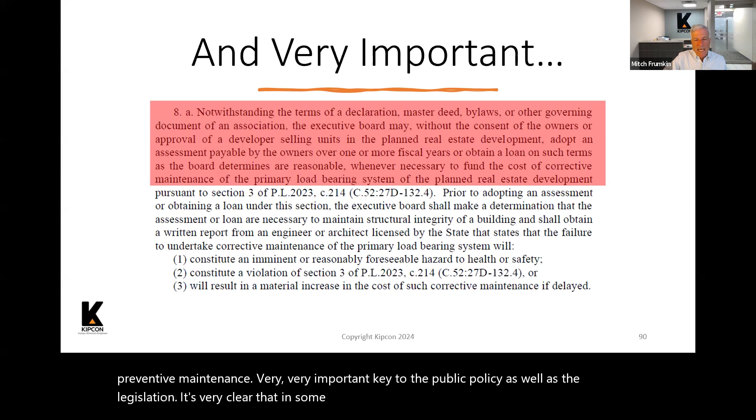Very, very important, key to the public policy as well as the legislation: it's very clear that in some instances, buildings have regulations that say you can't do a special assessment or borrowing without a vote of the membership. Both the legislation in New Jersey and every legislation I know, as well as the public policy, says that if the board is aware of a structural problem with the building, they don't have to follow the master deed or other governing documents, and they can borrow or do a special assessment to fix it, and they kind of have an obligation to do it.

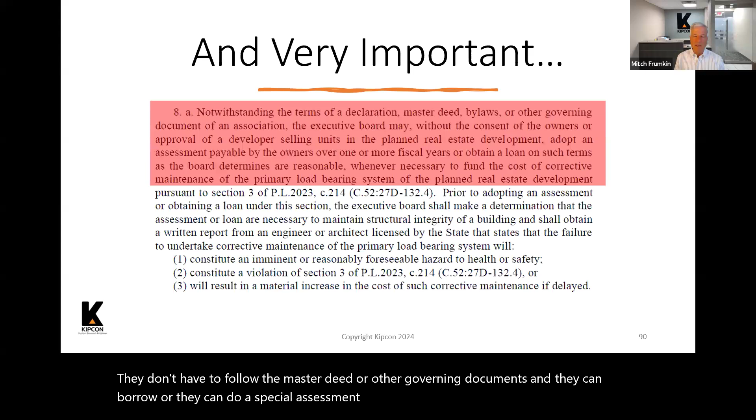But this one is actually from the New Jersey legislation: notwithstanding any declaration, master deed, bylaws, or governing documents, the executive board may, without the consent of the owners or approval of the developer selling units in the planned real estate development, adopt an assessment payable by the owners over 1 or more fiscal years, or obtain a loan on such terms as the board determines are reasonable, whenever necessary to fund the cost of corrective maintenance of the primary load-bearing system. So, if I'm not mistaken, some of this voting stuff became a problem in Florida in some buildings, but it's very, very clear that if there's a safety issue, you have to borrow the money.

Here's just some pictures to show what you should be looking for. Again, this is an example of a gutter that was put in place so water wouldn't drip on cars.

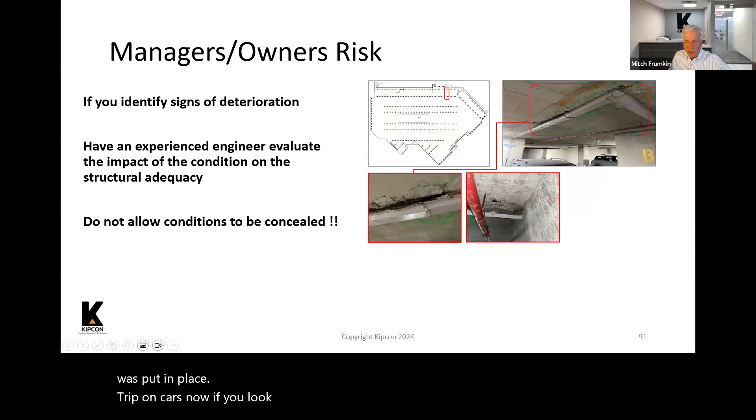If you look closer at what's going on there, you'll see that the concrete reinforcing steel is rusting away. This is interesting to look at, because when you get rusting of the reinforcing steel, you see the rust, this brown stuff. It's coming through, the water's going through the concrete, you see rust. To the left, you see this white stuff.

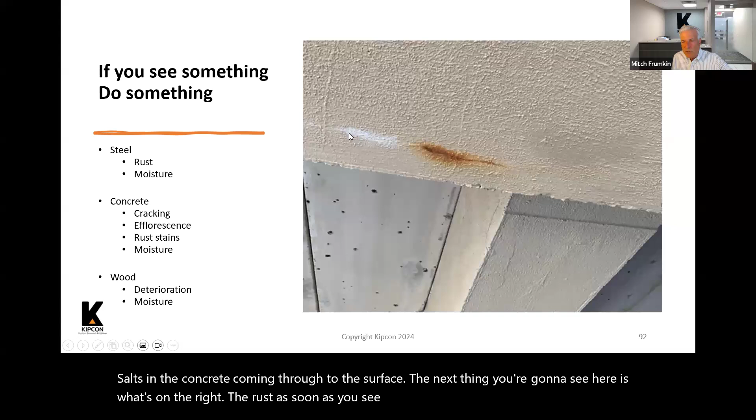That's called efflorescence. If water is going through the concrete and you're not yet having rusting, you'll see signs of efflorescence, which is the salts in the concrete coming through to the surface. The next thing you'll see is the rust on the right. As soon as you see efflorescence, you should fix it so it stops the water from going through the concrete, so you don't get to the rusting, because that's going to cost you a lot more to fix.

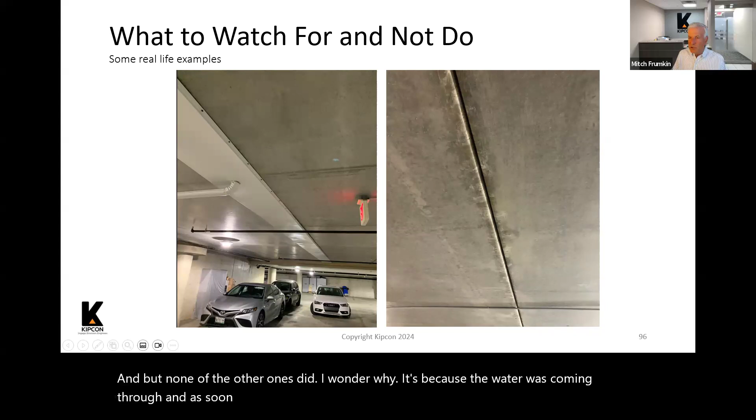Here's the common thing in parking garages, you see these things to divert the water away. This is a building I'm working on, you have all these joints between the concrete panels. One of them had this gutter, but none of the other ones did. I wonder why. It's because the water was coming through, and as soon as we took this off, we saw signs of structural deterioration there that was hidden by that gutter.

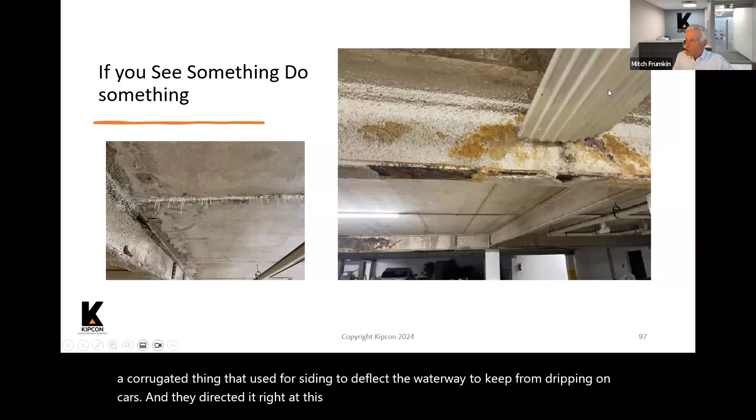This is my favorite one, I think this is slide 97, I always show it last. This is a podium deck. Water was coming through, and what they did to keep the water from dripping on the cars is put in this corrugated thing, like what you'd use for siding, to deflect the water and keep it from dripping on cars. And they directed it right at this steel beam. So for years, this water's been coming through the joint, deteriorating the concrete deck, and going against this steel beam, rusting the steel beam away.

This is one of my favorite ones, you can see what's going on. The water's overflowing here, and you can see the signs of rust going on behind that fireproofing insulation.

Now, I can't believe I did it, it's 10:30 exactly, but we started 2 minutes late. So, are there any questions? I see there's some in the chat.